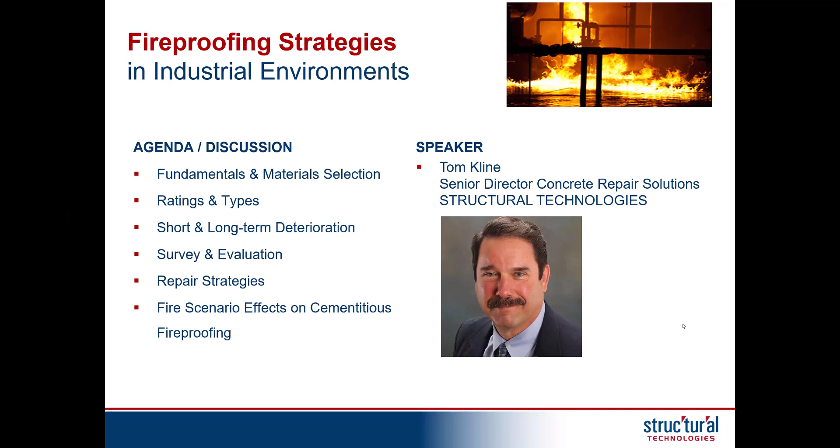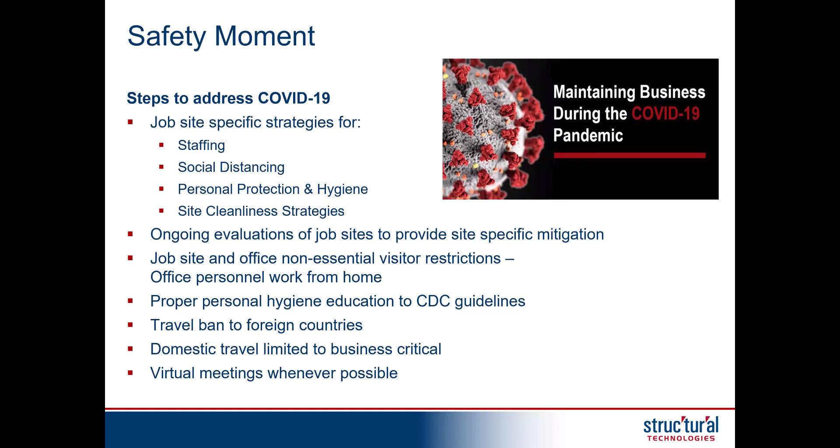Now let's get started with the presentation. So what's the purpose of fireproofing? It's pretty simple: it's maintaining structural stability and the integrity of the structural members being protected.

It can be not only structural framing members, but also vessel and pipe supports that are conveying very critical processes. There's a defined time for when it's exposed to a fire that we want it to stay integral and competent. The reason is we want to protect not only personnel that might be in a specific unit or plant facility, but also first responders that have to go in and knock down the fire event.

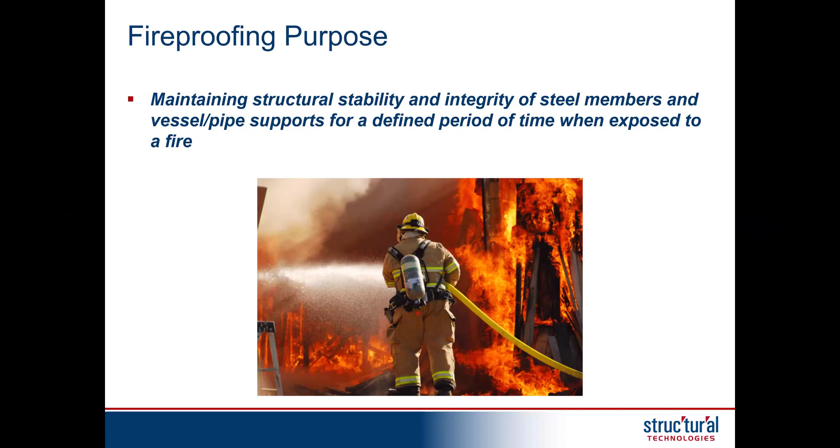So there are two different types of strategies when we start looking at fireproofing: active and passive forms. The active requires literally a response to activate the systems, and that can be things like a firewater deluge that has big, large monitors flooding down copious amounts of water to suppress the fire, or it can be a halon gas suppression system, which is literally taking the oxygen out of the air. But these all require a response.

The type we're going to talk about today is primarily a passive strategy, and that involves a barrier coating—it could be a barrier thickness, such as in concrete, or a thinner coating, such as in some intumescents. We'll talk about these different types of systems, but we're trying to protect that individual structural element or vessel from heat without any additional intervention, meaning a button doesn't need to be pushed in order to activate it. These passive fire protection systems are in all the markets, whether it's industrial, power, municipal, or commercial. They're all doing the same kinds of things, but what we'll see from this presentation is that there is a difference between interior fire protection systems and exterior fire protection systems.

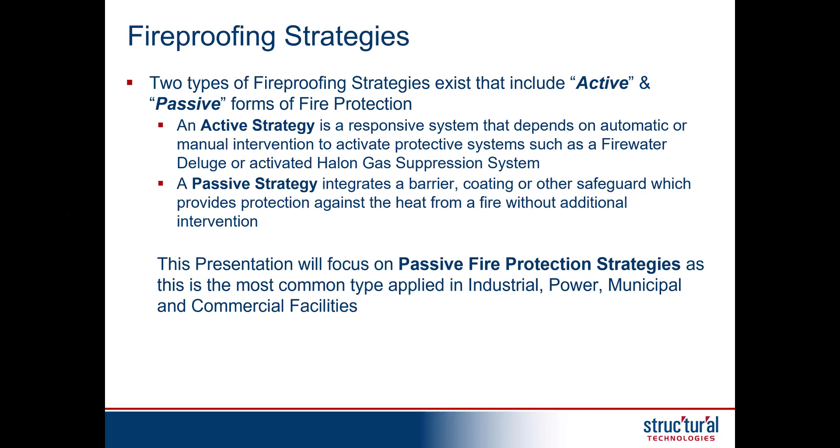That's primarily due to some of the environmental challenges. So what has really started to highlight these types of situations, fire scenarios really got activated. Fireproofing has been around for well over 100 years, but where it really became key is during the Piper Alpha disaster, which happened on the North Sea, an oil production rig.

167 people out of 229 died, primarily due to inactive deluge systems that required activation, and most of the sprinkler heads were already plugged. What made it very tragic is that most of the people that died ran to these BRBs, blast-resistant buildings, which also have 3-hour fire ratings, and waited inside those structures. Unfortunately, the fire lasted much longer than 3 hours, and most of the people died because of smoke inhalation, not from the burn. So it was very tragic.

The ones that did survive actually jumped, and it was 'stay and fry' or 'jump and try.' So those were the monikers.

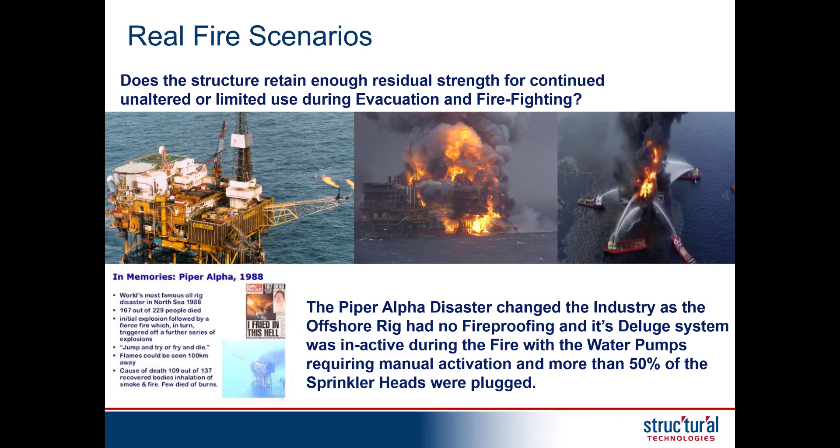So this was the initial one, and then the one that caused a lot of concern in the industry — I'm a member of the National Fire Protection Association — was the attack on 9/11 on the Twin Towers. During a very long and protracted investigation, it was seen that terrorists not only impacted the towers with a fuel-laden plane, but also that the fireproofing was probably inadequate on some of the floor truss members. So again, that fireproofing called into question can absolutely be a lifesaver.

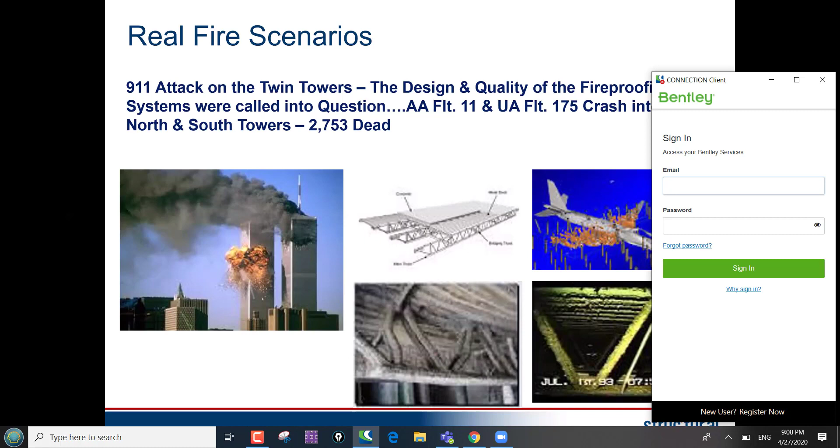So when we look at the basics, we're really trying to put passive fireproofing on these members at a minimum thickness. The reason we try to put it on at minimum thickness, after it's been tested, is to lower the dead load on the structures and vessels, because those loads still have got to be transmitted down through the element into the soil.

So we do it for a minimum thickness of a particular material, and there's a bunch of different types. We try to restrict that heat transfer, and that's important because that's the heat coming from the outside, and we want to keep it from getting into that protected element. We know at some point it will, because of thermal gradients, but we're trying to keep it out as long as possible, and that's where we get our rating.

And there's an acceptable steel temperature — we're mainly talking about structural steel members and vessels that we're trying to protect. It undergoes changes when it gets up to a certain temperature, and we'll talk about it in the next few slides. But essentially, we want to keep it stable so that it'll avoid collapse and buckling.

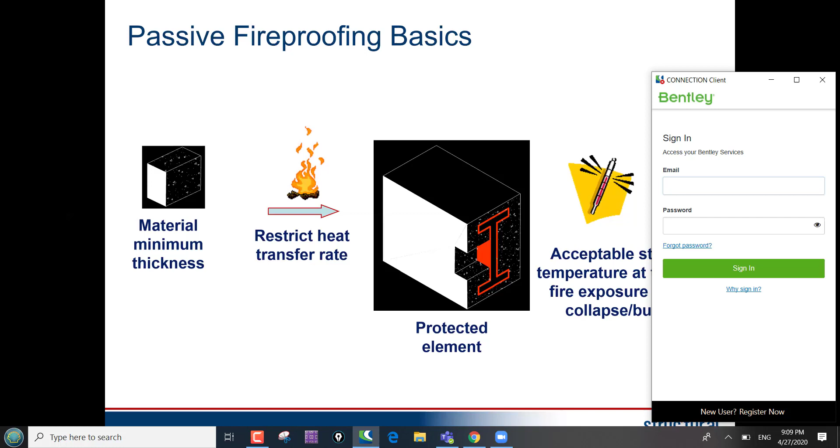As such, we see that ASTM actually came up with a more robust test in the form of ASTM E1529, which has a rapid rise — that's really what we're looking for — because when hydrocarbons burn, it can get hot, essentially 2,000 degrees Fahrenheit within 5 minutes. As we'll see from some graphs coming up, cellulose really never even gets that hot functionally.

Now, what is accepted in the industry right now worldwide is essentially Underwriters Laboratory Test 1709, which is set up similar to ASTM 1529. There's a 30% higher heat load with the 1709 versus the 1529. What's special about these tests is they also evaluate the weathering and effects of aging on systems. So getting a successful UL 1709 test result is very important for manufacturers of these fireproofing materials.

And if you're a specifier in the audience, the webinar audience, it's very important that you look to see that they have a UL 1709 rating on the fireproofing materials if it's going to be used in a petrochemical facility.

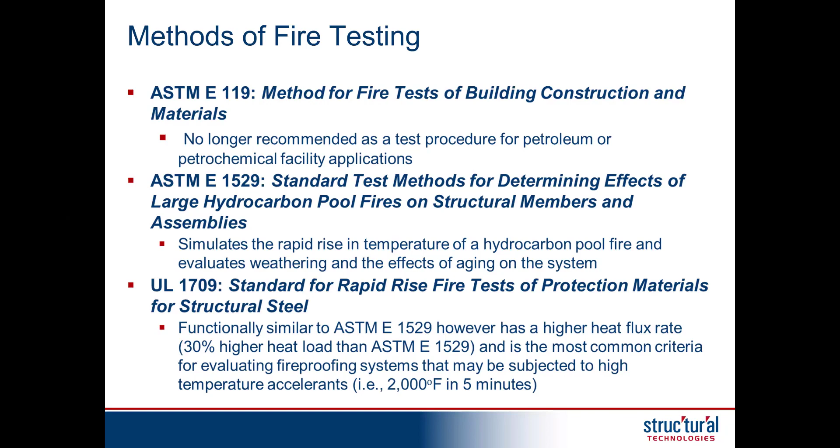So I was talking about these curves a little bit earlier, and it's important to see how differently hydrocarbon-fueled fires operate from cellulose. It takes much longer, and it doesn't get nearly as hot. Now, cellulose is very important because most building materials are made of cellulose, but the hydrocarbon is very special, and we're showing just some standard hydrocarbons such as lube oils and crude.

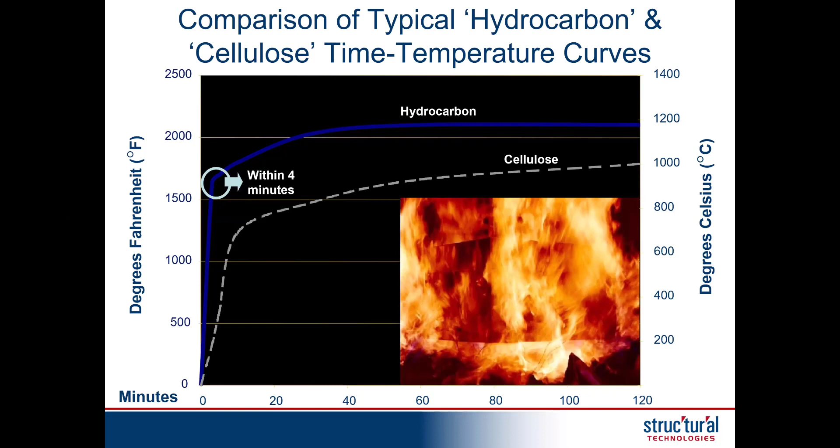But when we get into jet fuels, it can rise much higher and much faster when we have very special volatile materials. So it's very important, especially for firefighters, when it comes time to knock down the fire, especially if they're in a confined space such as a building, that they're aware of what they're entering when these fires kick off.

Now, I talked about the temperature being important with structural steel members, and we're really looking at 1,000 degrees Fahrenheit as the go, no-go for the fire rating. That's where there's a 50% reduction in strength, and we see that as important because that's when that structural steel member—and for testing it's a W10 by 49 that they use to standard test these products—but we're looking at a 50% reduction in strength, and that's what is believed in the industry as enough to cause buckling and or collapse.

So that is how we get our fire rating: the time it takes for that internal member to reach 1,000 degrees Fahrenheit, and how we do that in the testing procedures is by thermocoupling the actual structural member itself.

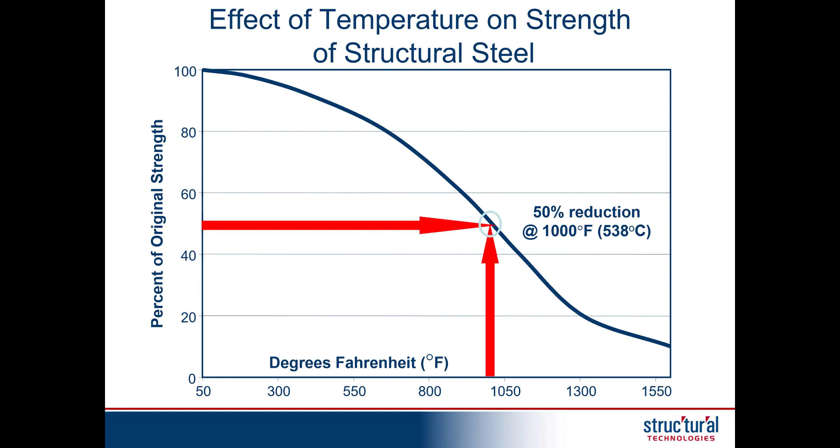So the rating is a function of time and ease of evacuation, the fire hazard posed by the substance, and then the fire suppression capabilities, meaning is there a certain time before first responders get there. Obviously, we want the personnel out of there, and we want to protect the first responders when it comes time to actually knock down the fire.

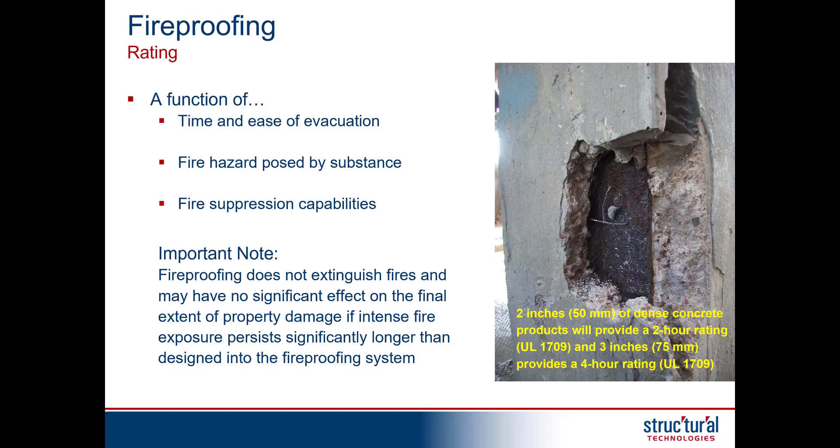2 inches of dense concrete is going to provide about a 2-hour fire rating. 3 inches, 75 mm, is going to provide a 4-hour rating, and that's according to the American Petroleum Institute guideline, which is API 2218.

So we try to also look at behavior when there's going to be a fire and explosion, and what that fireproofing needs to resist—obviously thermal, but also erosive forces when we're talking about potentially having a jet fire where there are very high streams of heat hitting a particular member or vessel. What that surface temperature of the substrate is going to be, ultimately to make sure that fireproofing is going to be able to bond during the event.

Believe it or not, making sure the fireproofing is also non-combustible, because some of these materials, if they don't have adequate sealers placed on them—some of these lightweight cementitious materials—they can actually absorb hydrocarbons and act like a porous sponge if they're not adequately sealed, and can actually catch fire.

And then obviously it needs to withstand explosion and subsequent drag pressures. What does that mean? That means if it's a large box furnace on top of some columns and we have an explosion within that, there's going to be a stimulus and a response, and we're talking nanoseconds. With these explosion and drag pressures, literally cementitious materials that might be attached to the columns, if they're not adequately reinforced, can actually burst off of the member and no longer provide fire protection.

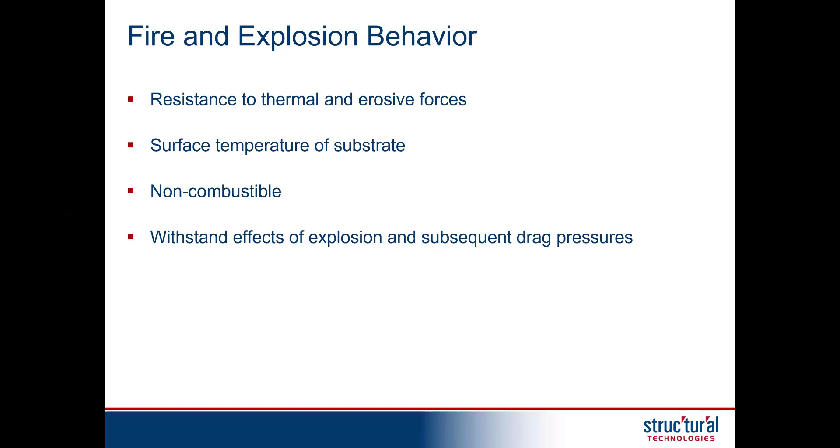Now, pre-fire durability—I was talking earlier about weathering in some of the testing means and methods—chemical tolerance is important, especially in units that might have products they're producing that can deteriorate the fireproofing materials, not just concrete, but also some of the other coatings and linings applied for fire resistance.

It's got to be vibration resistant also in those regions that might have reciprocating compressors, those kinds of things. Also hardness is important, especially when we're talking about first level areas that might be impacted or nicked by skid steers or pallet jacks, and even a small nick or cut within, say, an intumescent coating creates a hot spot during a fire event.

So many of the specifications for brand new construction require essentially concrete as fireproofing on the first level, and then everything up from that turns out to be a much lighter weight material that can't take the impact. Abrasion and erosion resistance is important too, especially when it comes time to knock down the fire.

Some of the materials we'll talk about actually get engaged at high temperatures but form a carbonaceous char. And if you hit it with a fire hose, the streaming itself can actually wash it off of the structural steel member.

And if the fire reignites, it has no way of protecting the steel because the fireproofing material was essentially washed off. We'll talk a little more about bonding strength, especially with coating materials such as intumescents, which need an incredibly strong bond so that when it initiates, it's well bonded and won't pop off. And obviously washdown resistance, especially in areas that might have spills and things we need to remove from the surface so it doesn't act as a flammable coating over a structural member.

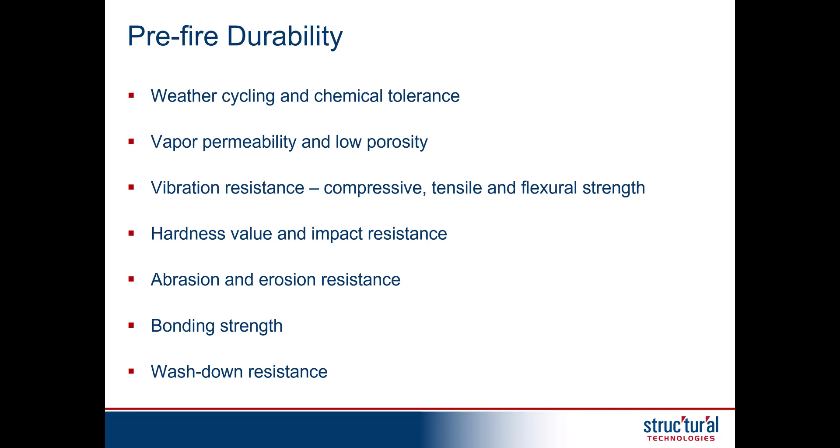There are many different types of passive fireproofing materials. The most common is cementitious, because many older structures had concrete. We say three things about concrete: it's pretty good in a fire, nobody's going to steal it, and it cracks. But concrete is a very good fireproofing material—hard, durable, economic, and easy to install, using similar means and methods as formwork and placement, or spray applied if it's a shotcrete material.

The intumescents are relatively new on the scene, but they've been around at least 30 to 40 years, coming over from Europe to the U.S. What's nice is they form a carbonaceous char with excellent corrosion resistance for structural steel. A big problem with cementitious materials is corrosion under fireproofing, the CUF. When an intumescent is applied, we can actually see if there's steel corrosion underneath—it will start bubbling up and you can see it, whereas with cementitious materials you often don't until it's too late.

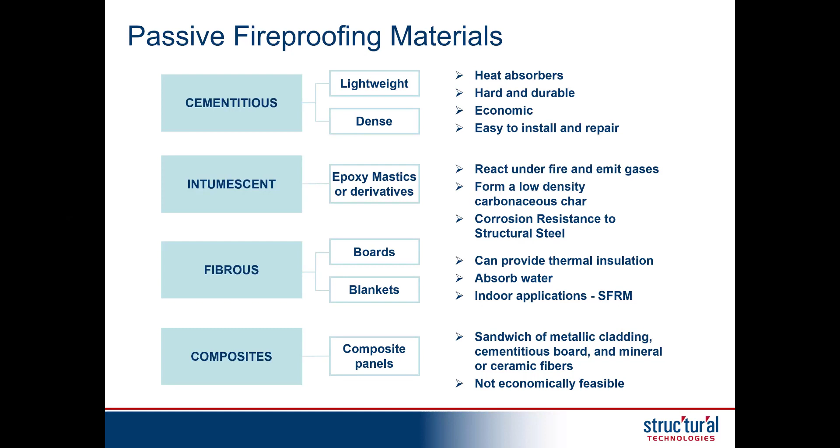There are other types of products—endothermic blankets, boards literally cut to fit, these inorganic boards. There's also indoor applications with sprayed fiber-reinforced fire-resistant materials. And then there are composite panels, which are very specialized, typically put onto noise-resistant cabinets housing more critical equipment. They're built by cabinet makers and typically not installed in the field except associated with sophisticated and important critical equipment in plants.

When we talk about SFRMs, they have aggregates and fibers conveyed through a hose and mixed, and typically sprayed on, as the name implies. They can be a lot of different types of products—the intumescents are included in this, along with lightweight cementitious materials, which can include even lightweight concretes.

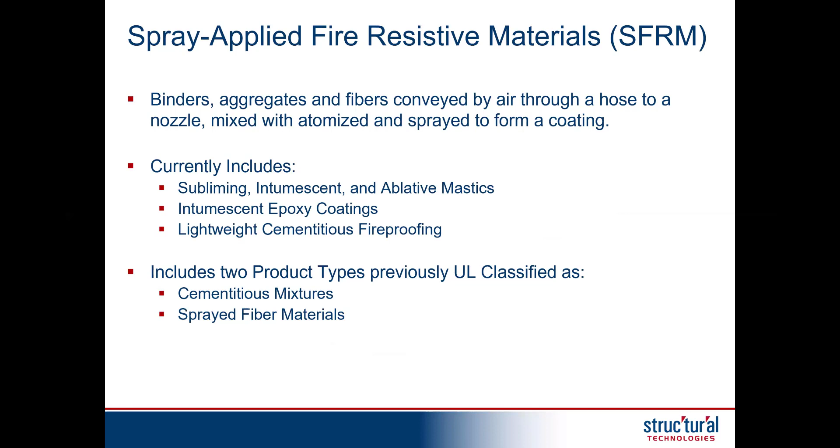When we look at cementitious concrete materials, which are the most common, they can be made with many different types of cements, including Portland, but also geopolymers and modified fire-resistant cements—we're talking about calcium aluminates, those kinds of things.

When we classify cementitious fireproofing materials related to concrete, we go either dense or lightweight. Dense is 140 to 150 pounds per cubic foot versus lightweight at 25 to 80 pounds per cubic foot. What's interesting is thermal conductivity tends to be inversely proportional to weight, meaning lightweight concrete typically performs better in a fire test than dense concrete, because there's more porosity locked into the cementitious matrix or cement paste.

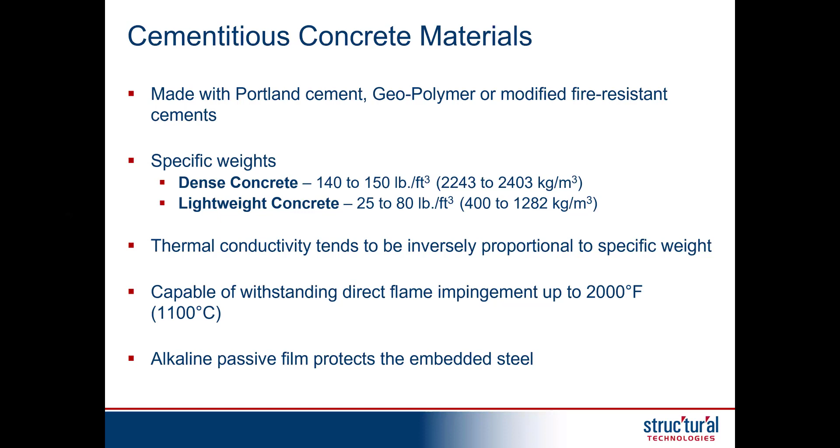With that porosity, that means air, and that air acts as an insulator, which is terrific. What's great about these cementitious materials is they can take flame impingement up to 2,000 degrees Fahrenheit, which is our hydrocarbon pool fire. Depending on the thickness, we can get different hour ratings, and it provides another protective film to the embedded steel. Also, the alkalinity in cementitious materials provides passivity to the steel members encased in it. The only issue is when alkaline conditions change to carbonation, where we can have a lowering of alkalinity, but that's usually much later.

So where do we find concrete fireproofing? We find it in process units, multi-level equipment structures, pipe racks—very similar to where you'd find concrete generally, and we find it all over the world, in a lot of different regions. During a fire scenario, it protects specific surfaces of a member, and concrete is very forgiving.

It's hygroscopic, so it freely gives up excess water. There's always excess water in the matrix of concrete - it's called moisture of convenience. Well, that water wants to go and cool off the surface.

Now, as it's migrating through the capillaries and pore structure of the concrete, it takes with it in solution soluble salts. These salts are in solution with the water, migrating to the concrete surface to cool it. But at some point, because there are isotherms - different varying levels of heat within the concrete - they precipitate out.

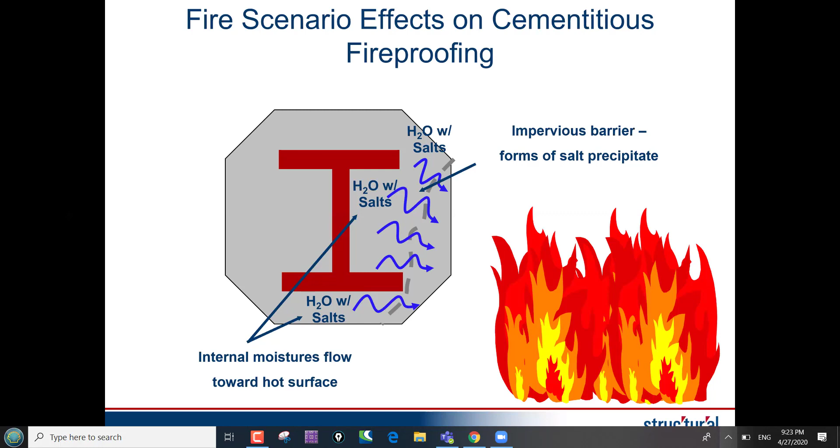As you can see from the dashed line there, that's where we start getting a boundary. That boundary forms after a significant amount of the salts crystallize and essentially pore block, not allowing any more moisture out.

The concrete still wants to give of itself, and moisture continues coming out of that concrete mass, and it can't go any further. Then that moisture turns to steam and jettisons out, or spalls the concrete. We have anecdotal evidence from fires where we can actually see those surfaces are white with crystalline salt products. It's also known as efflorescence and a bunch of other things, but a lot of it is calcium carbonate, and you see that just by anecdotal evidence.

That's why it's so important when it comes time to do repairs on cementitious fireproofing - you have to go all the way around, 360 degrees circumference of the member. You can't just patch because of the amount of salts in the pores.

So what will happen the next time there's a fire event, that moisture is going to want to try to get out again, and that new repair you put on will also be jettisoned off. There have been many instances where firefighters have been injured by patch repairs that were performed just right over top of a previous fire damaged area.

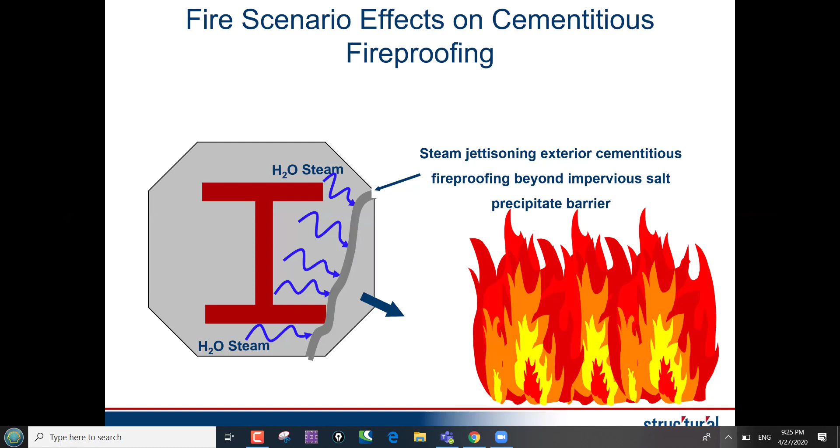So probably, as I indicated earlier, the most prolific thing that you'll see on the internet is the idea of having intumescent fireproofing products. It does a lot of terrific things. They're typically lighter weight, and you can see corrosion of the embedded structural steel should that happen at a later date. There are a couple of different types.

There's solvent-based, which is the older technology primarily used for exterior applications. The reason is that solvent-based intumescents produce a noxious and/or toxic gas as soon as they start to char, and this toxic gas can actually kill people within the area. That's why they had to come up with another version of this, which is water-based, especially for big department stores and that kind of thing.

So if there is a fire, it can still protect critical structural members, but it's not going to give off harmful or toxic gases that form this intumescent char. Unfortunately, those aren't good for exterior areas because they're not tolerant to humidity. They'll absorb water and/or suffer in low temperatures, especially in those northern regions.

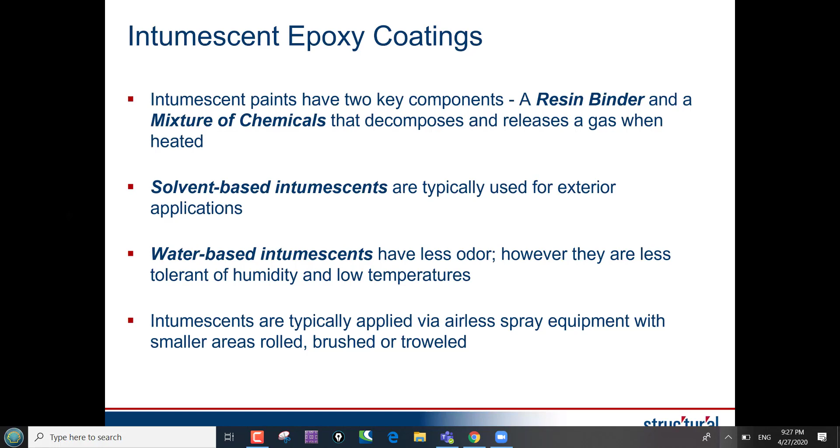They're typically applied via spray equipment, so pretty straightforward, but you have to have excellent craftsmanship, and the people installing them typically have to be certified. For smaller areas, obviously rolled, brushed, or troweled - so they work similar to many of the cementitious materials that have to be applied in the field when you can't form it up. So they're washable.

What's great is you can get them in different colors, and you can get them where they're mark resistant, meaning graffiti resistant. So that's terrific, especially in public areas.

They're protecting that steel. NACE had an acronym for many years, corrosion under insulation, primarily related to piping under insulation. But because of the damage that's worldwide, NACE came up with another acronym, CUF - this is corrosion under fireproofing.

So what's great is it is prepared as a coating, a protective coating to be placed over top of the structural steel, so more surface preparation, that kind of thing. Also, if there is corrosion happening underneath the system, you'll be able to see it on the outside - it'll actually start bubbling.

As I indicated, it's required to have that applicator certification. Another downside to it is it's generally higher in cost compared to cementitious materials. So it's literally weighing the pros and cons with these systems.

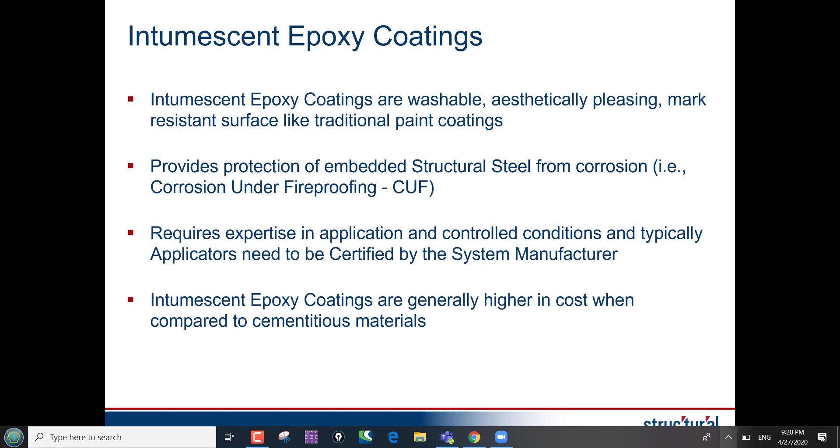Now, how does it work? Because that's always the biggest thing, and probably the secret sauce that nobody seems to understand about these products - it's got to get really hot, much hotter than anything that would be in a standard process. So we're looking at 200 to 250 C, or well over 400 degrees Fahrenheit.

What happens is there's a resin within the matrix that melts, and as it melts, it's also starting to generate a gas, and this gas then forms what's called a multicellular insulating blanket. Essentially, it's non-interconnected bubbles forming this insulating material. It limits the spread of fire, but it doesn't put it out. Like I said, none of these passive systems puts out fire.

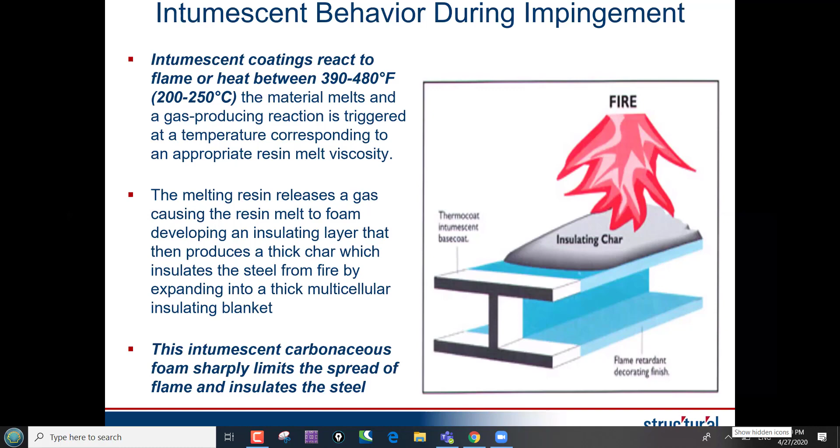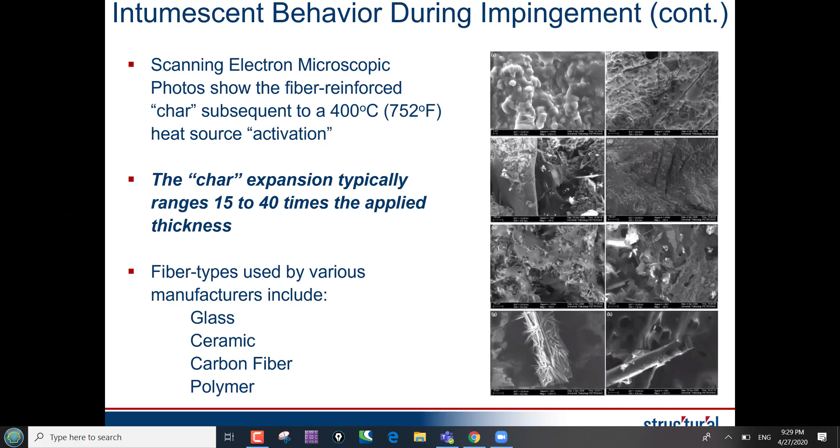Now, these are very high power microscopy images in order for us to take a look at these. But they all have something in common, which is to have fibers in it, so that when it does expand—and we're talking 15 to 40 times—it's still going to hold together and it's not going to flake off.

So discussing that, we know that everything deteriorates, and we're very concerned when talking about fireproofing deterioration because it's all associated with risk. This is also how underwriters with insurance companies are looking at it. Believe it or not, much of our work is initiated by correspondence from insurance companies that have cited a client of theirs for having something at risk, and they don't have a system in place to evaluate it.

As Eva indicated earlier, we developed a system known as the Plant Condition Management System that specifically looks at all of these kinds of civil assets. And then there's an adjunct to that, which is the American Petroleum Institute's Guide 2218, which also helps classify and put together a program for repair.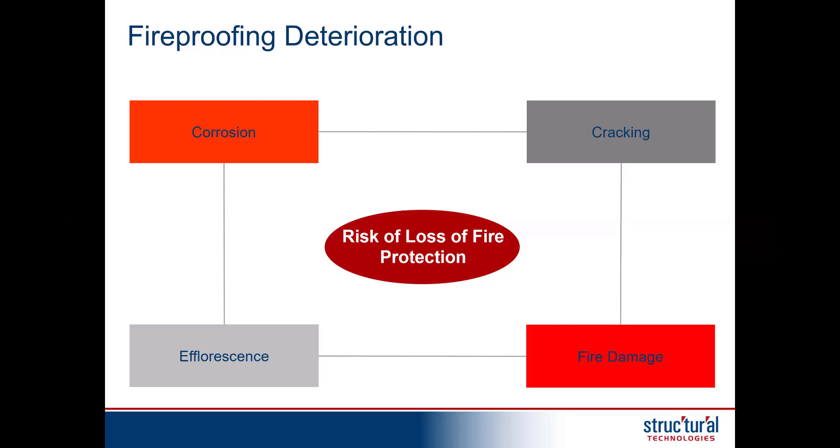So we're taking cementitious concrete as an example, showing some of the deterioration mechanisms, because it is the most common worldwide. We take a look at the embedded member and potential cracking. As I indicated earlier, we say those three things about concrete, and cracking is one of them. Also, these fireproofing materials are typically very lightly reinforced when we're talking about concrete around these members. Typically, they have a 2-inch by 2-inch mesh, or 50mm by 50mm galvanized mesh that is then studded and attached to the steel member.

But what can happen over time is we get cracking. It's a direct conduit to the outside, allowing moisture and oxygen to get to that embedded structural steel member, and then that results in corrosion.

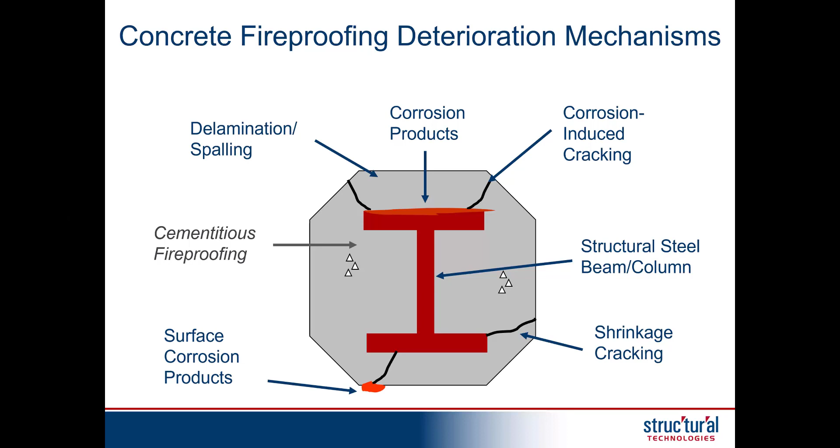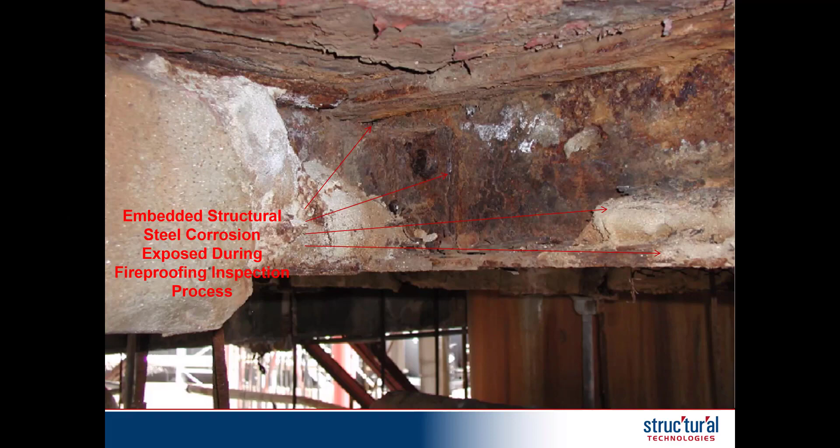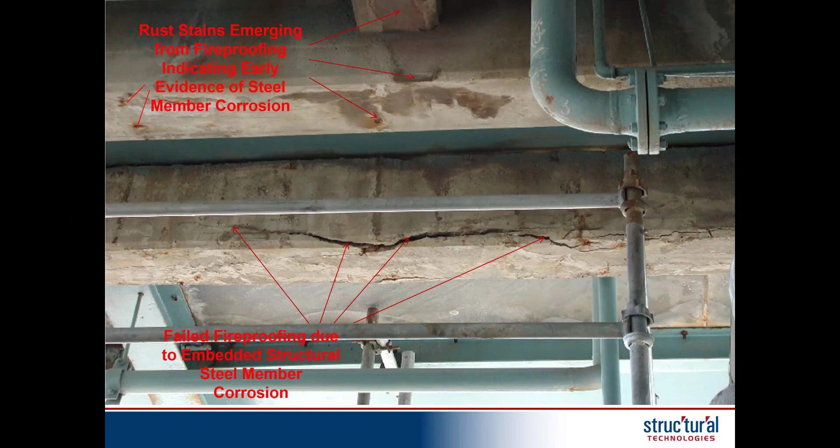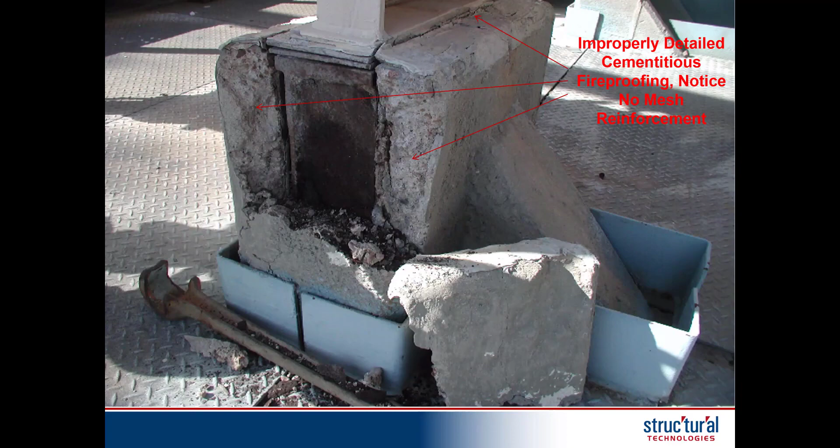They kept patching it over and over again, thinking that was going to take care of it. You can see some of the waterproofing materials at the top. They really didn't understand the root cause, especially as it relates to failure of the fireproofing. We also see there can be many things embedded within the concrete that are critical for corrosion.

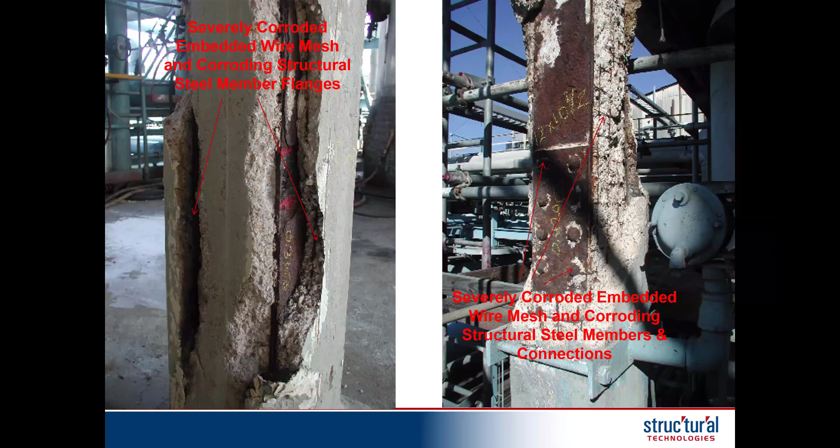The photo to the right is showing riveted connections. This very old structure, from the 1920s, is in the Gulf Coast, but you can still see some remnants of the embedded mesh there. Unfortunately, when I tapped those rivet heads, they actually started popping off, and that's obviously a friction connection, a shear connection with the rivets in place. So that was a big problem.

This was allowing the owner to make a risk assessment. The picture to the left shows, yes, it had embedded wire, but also a lot of lack of consolidation around it, a lot of honeycombing, or rocks without cement paste. So that deteriorated very quickly, and you can see the flanges starting to corrode, obviously not providing any fire protection.

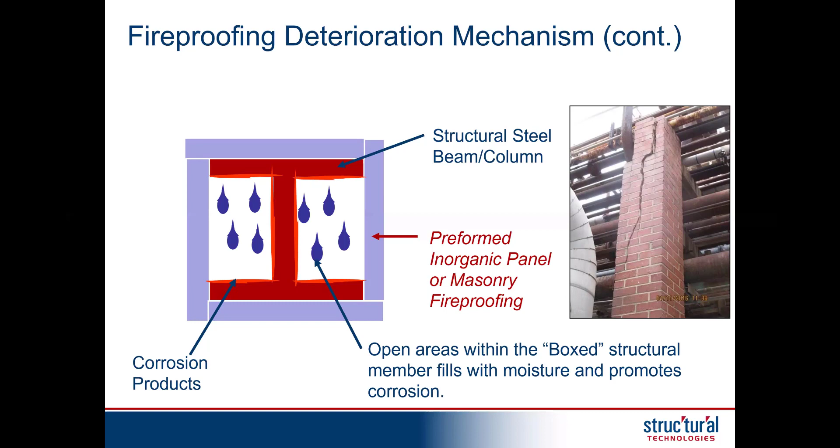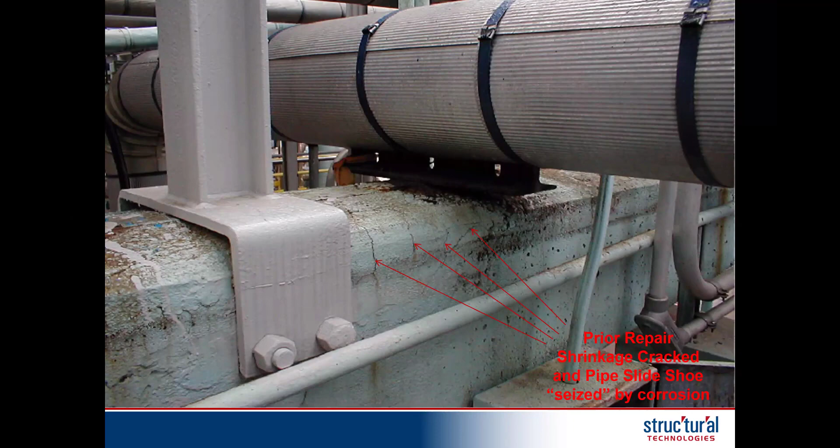We also see other things that are process-related that can damage the fireproofing. This particular one shows a pipe shoe on top of a pipe rack beam. You can see over the years it's been repaired several times, meaning they didn't address the root cause. It's been painted. Essentially they had the steel beam located higher up into the fireproof section, put there on purpose, not so much to be protected by fire, but so the pipe shoe could run over top of it.

Unfortunately, these pipes would move in and out with process streams, and it corroded and seized up. It started galling, and because of that it froze, and then it started rotating the concrete, and we had breakage on both sides. We had to understand the root cause, and the root cause was the seizing up. So we came up with a new system, putting a half-round steel bar and having the pipe shoe run on top of that half-round instead of fully flat on the embedded steel beam.

This becomes a big problem, and we see this quite frequently in older refineries and chemical plants where they have steel beams with the flange exposed. As you can imagine, that exposed flange is also subject to atmospheric corrosion.

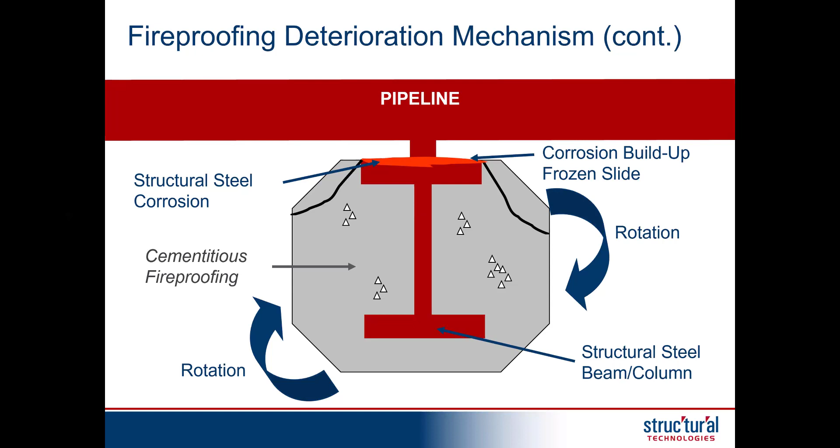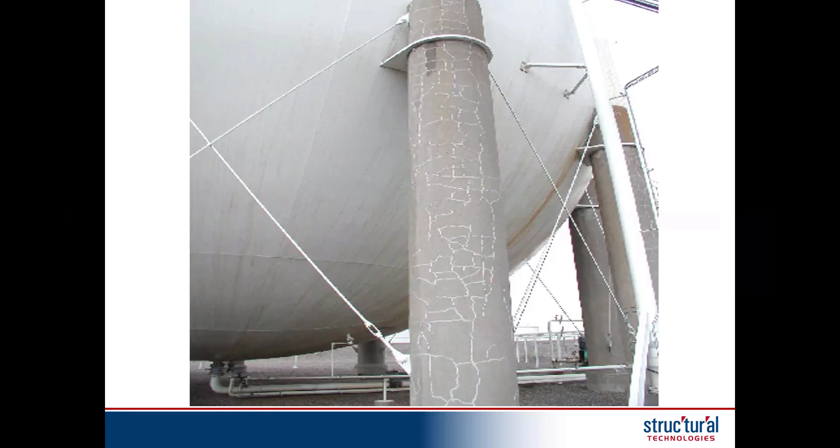A lot of fireproofing is also on unique geometric structures such as spheres, and primarily the pipe columns that are tangentially welded to the spheres. Here's a customer who actually took a painstaking amount of time to seal all the cracking. Probably would have been a lot better to just put an elastomeric coating over top to protect it.

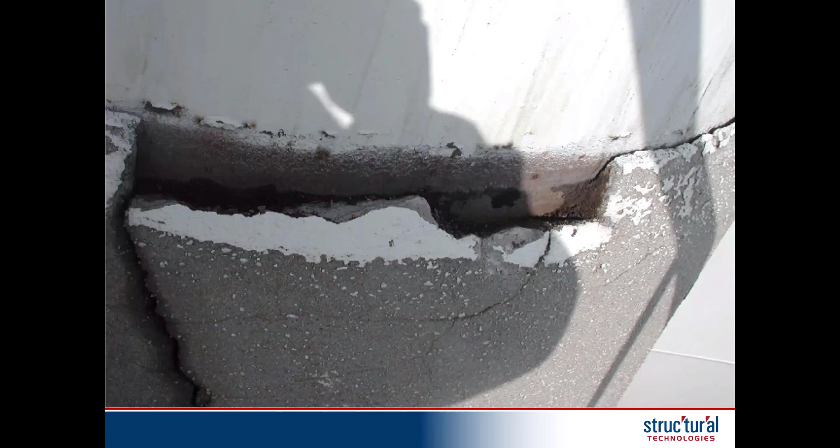When we got to the top of this type of pipe column, we found they had originally removed the rain gutter, and you can see that from the weld parts, the stitch welding remnants there. So water was coming right off the sphere and down the leg, going right into that annulus between the cementitious materials that had been tapered, then running straight down the leg and causing corrosion.

So we knew we had to remove that section or put a new rain gutter, which goes all the way around the member to keep rainwater from going down into that annulus.

When we look at these structures with fireproofing, many times the diagonal members don't have to be fireproof, so you can see that readily. They're not fireproof, but you can see the amount of damage in the pipe columns here, especially with the corrosion emerging from a lot of the cracking.

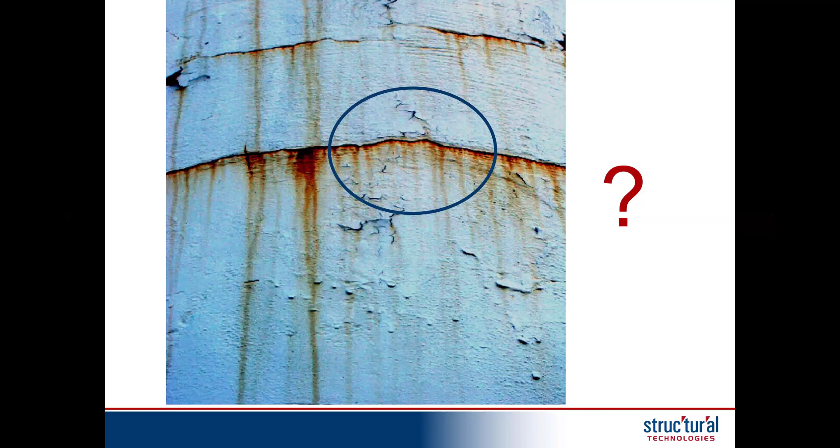But how much is there? The only way we can really tell is by doing these limited excavations, typically 6 inches by 6 inches, so we can get in there. What's interesting is you can tell from this photo, in excavation, we can see areas that had corrosion very defined at certain levels.

The region above it is almost pristine. The steel is uncorroded. There's still galvanizing on the mesh within the fireproofing. But as soon as you get to the lower line, you see the pitting corrosion, the galvanizing is off, and even the mesh is missing in many regions.

So these excavations are important, especially when we want to get an idea about the remaining thickness and competency of the structural steel member that's supporting the vessel.

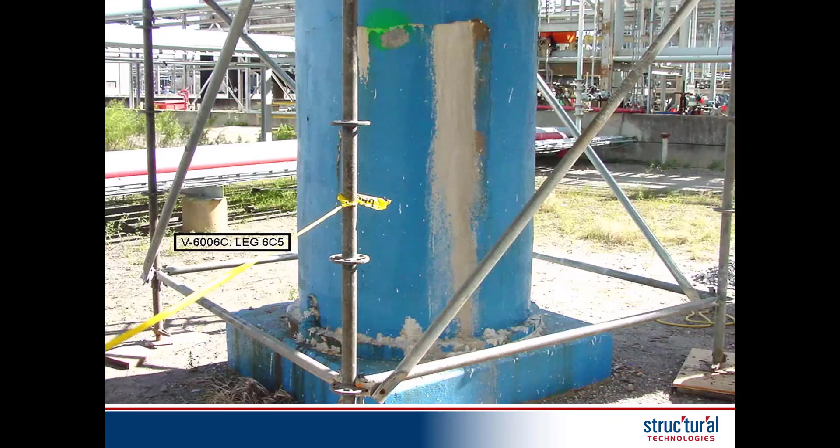What you might imagine from seeing this, you see the efflorescence coming out. You know there's moisture travel. This is at the base of a column. You see the calcium carbonate coming out. That's when the moisture mixes and commingles with the calcium silicate hydrate, which is the glue that holds the concrete together. It emerges. It's calcium. If you were to taste that, I don't recommend it, but if you were, it'd be very tart.

So it's salt-free lime. But what you don't see here is a lot of steel corrosion products, meaning rusting. So that's telling us maybe we're early in the curve, but it definitely needs to be addressed, and that moisture is emanating from much higher in elevation.

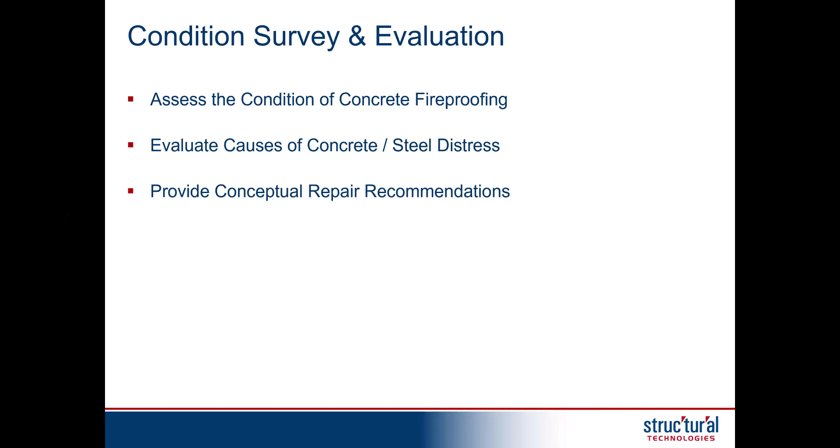So we do this by condition surveys and evaluations. We need to understand the cause of the distress and provide conceptual repair recommendations. Just to give an idea, this is a specific sphere like what we were just showing previously. We map the cracking, and then identify those locations for taking some excavation.

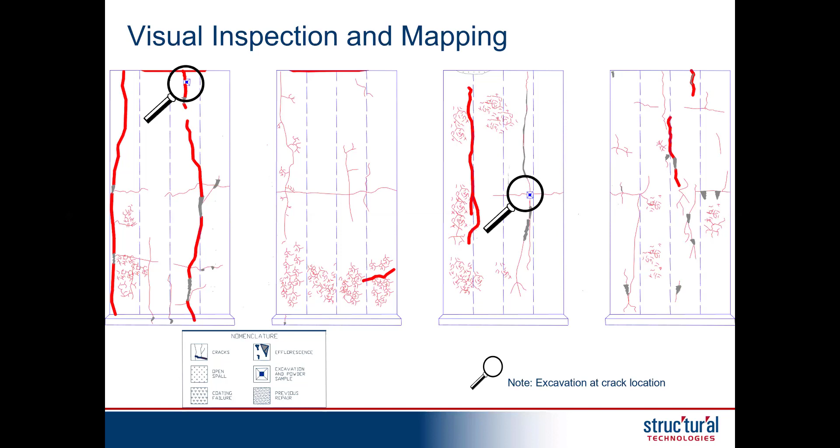And it doesn't have to be just on a sphere. It can be on individual structural elements, both horizontal and vertical. Again, we need to get to that sound side. We're taking specimens out so that we can understand the pH of the material, through the process of carbonation, as I indicated earlier.

pH typically for brand new concrete is between 12 and 13. As it drops during service, as soon as it gets below what we consider 10 or 9.8, it can be an active participant in the corrosion process.

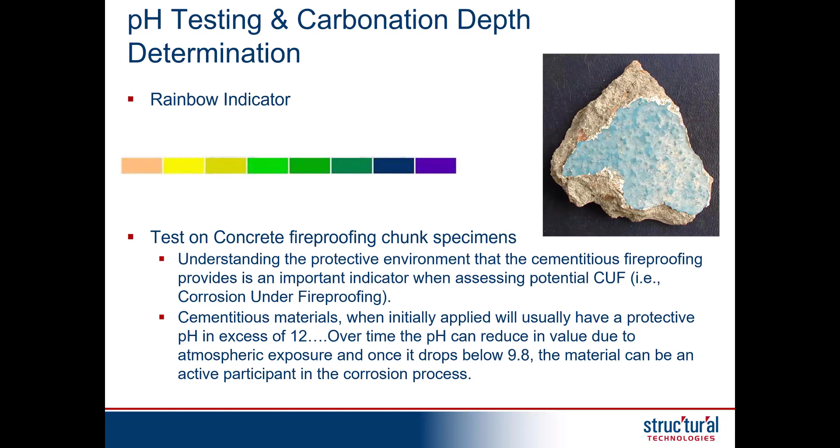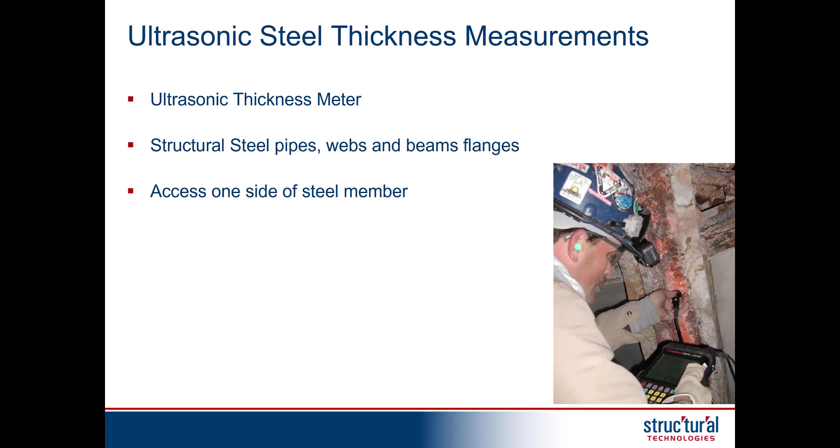So we do some limited testing. We also do more specific testing in the field when we're trying to get an idea about the remaining thickness of the structural members. When we do that, we're comparing the theoretical, what was in the original design drawings, versus the measured, and then calculate the section loss and whether that's a critical member as defined by a structural engineer or something that has some safety factor associated.

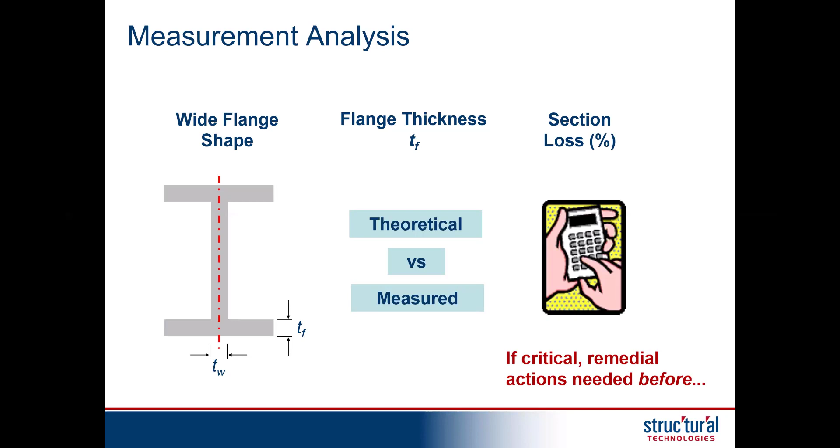So for a conclusion, and the need for fireproofing restoration, we always recommend that not only the PCMS, our plant condition management system, survey be done, where we can take a look at literally hundreds if not thousands of assets, but also applying it to API 2218. It's important because that's going to help determine the fireproofing needs, based on the processes in the area. You can have a civil engineer go out and take a look at your structural assets, and we're very good structural engineers and contractors, but you really need to have a process engineer or the owner on the same route as you're looking at these structures to see if, in fact, you need the fireproofing, like what's being shown in that photograph.

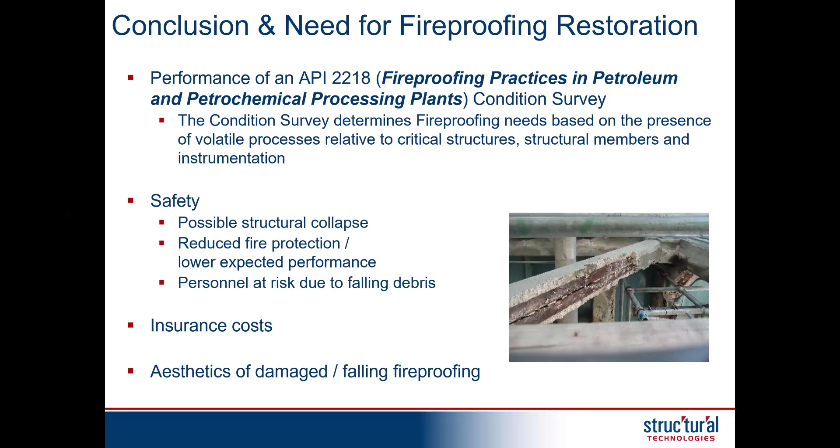That API 2218 process and surveys is very important because it can definitely save money, but also identify those areas that should have fireproofing and don't currently, because safety is key, and we want to make sure that we're minimizing the potential of structural collapse, especially during a fire event, and make sure that personnel operating there aren't at risk from falling concrete hazards, especially in dense structures where we can have a ricochet effect, and also critical equipment. It also helps lower insurance costs and the aesthetics, obviously, of damage or falling fireproofing. It can look quite terrible.

So that's where we're at and our next steps. I always like to leave the last slide to indicate that we have representatives in the region, with Ahmed being in the UAE and Redwan in the Kingdom. So at that point, Heba, I'm definitely ready for some questions.

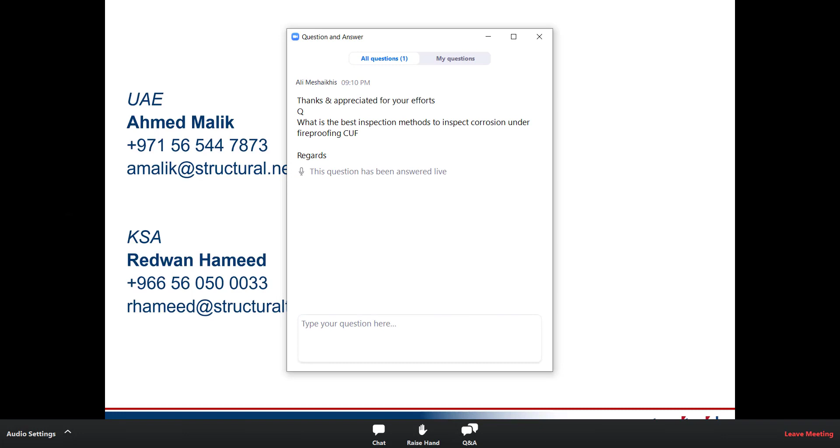It depends primarily on the reinforced concrete cover. If it's in a very aggressive area, we might recommend, according to code—and when I'm talking code, I'm talking about the American Concrete Institute code 318, which is the building code—there might be 3 inches of concrete cover recommended, and that's also if it's in contact with the earth or in high sulfate areas. That's going to give you at least 3 hours of protection with that 3 inches before it's going to uncover the steel. Now the steel bars, what happens during that period of time, is they're better conductors, as you might imagine, of heat, and the steel bars will take the heat further into the concrete mass.

Believe it or not, we see far more damage on massive concrete structures because there's large amounts of bars, especially in the exterior regions, that then hook into the mass of the concrete, and that heat goes deeper in versus very thin members. Versus the thin concrete members, damage may not be nearly as severe.

Now, I'm going to be giving a presentation in the next couple weeks just on fire damage concrete and how we evaluate it, which will more appropriately answer your question.

But the thing is, you're looking at least 3 hours before any specific damage, and that's for a petrochemical fueled fire. Now, as I indicated, all of these structures are designed differently, and it's the amount of steel in the member and whether it's a column or a beam. Obviously, a column is going to have a situation in a vertical orientation for racking, where a beam might undergo torsion.

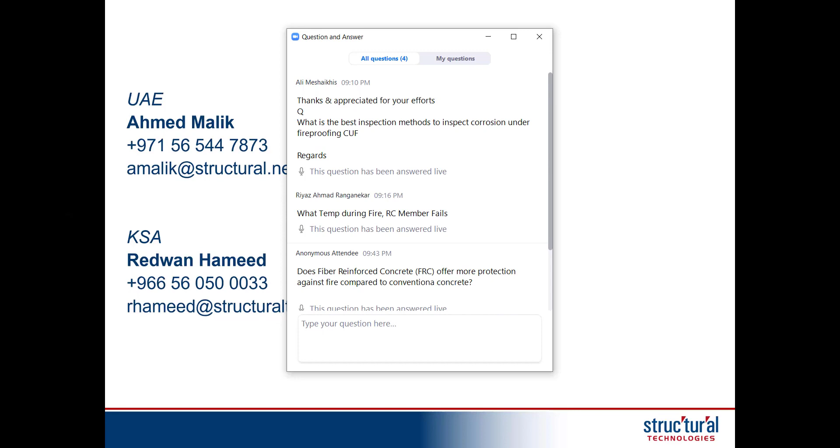All right, another question: is pre-stressed and post-tension member more vulnerable under fire without any additional fire protection measures? Yes, they're more vulnerable, just as I indicated earlier. So there has to be additional means and methods taken, as provided in the code, additional concrete cover, and additional mild reinforcing steel placed within the member to provide protection during a fire event.

As I indicated, there's a tendency for relaxation, so they're losing their stress. As we understand, the reason for post-tensioning and pre-stressing is to provide compression on the member so we can have smaller amounts of material. Concrete's very strong in compression, very weak in tension, so we're trying to remove a lot of the tensile forces on the member so it's able to be made thinner and smaller. The issue is, with fire, it detensions them essentially, so we lose that amount of compression, and the members become more susceptible to load failure. We see this often.

So as long as there's additional mild reinforcement placed in there, when the member does fail, it will fail ductilely, meaning slow and gradual, like a conventionally reinforced concrete member would be able to handle. That's a great question.